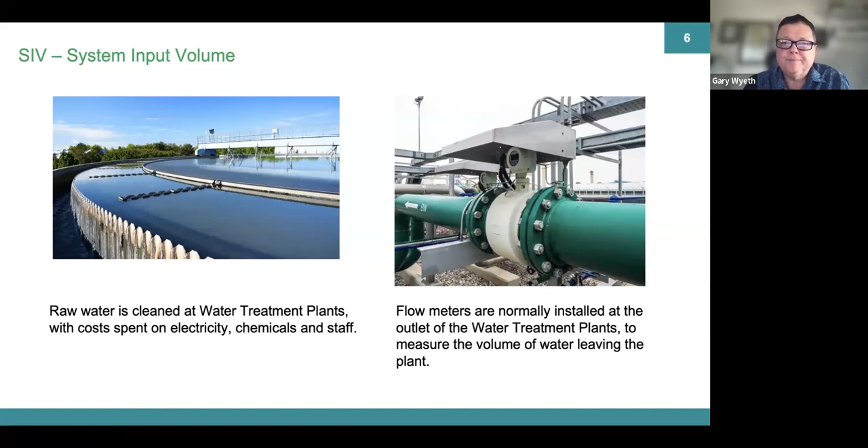Then at the other end of the system, we have a series of customer meters. In most countries, we would hope that all of our customers are metered so that we're measuring accurately how much water they are consuming. Those meters will be read on a regular basis, and the customers billed for the water they've used. So we've got two cost elements: the cost of treating the water coming out of the treatment plant, and the amount of revenue we're getting back from our customers.

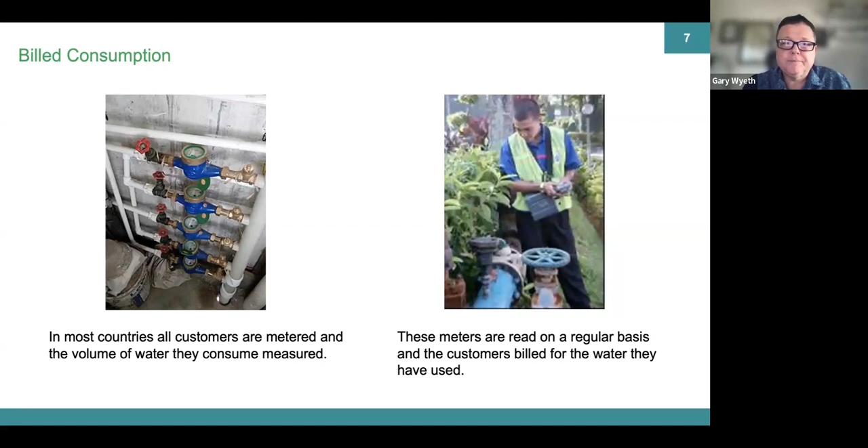There's actually a very simple formula for non-revenue water: system input volume minus billed volume. That means the volume of water coming out of our treatment plants minus the total volume being billed to our customers. The difference is called non-revenue water, because we're spending money to treat that water but not getting it back as revenue. Basically, we're spending water that's being wasted.

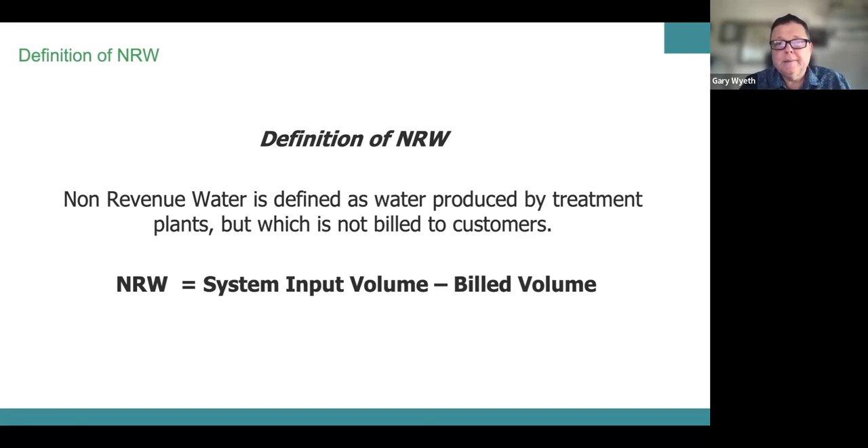Just to give you a little overview of non-revenue water, this is something conducted by a Japanese water research center back in 2016. It's probably quite old data now, and I wouldn't worry about the numbers because a lot of that has changed. But the key thing is you can see non-revenue water is very variable. We can get some utilities with non-revenue water down at 10%, as you can see here, which is in Japan—not the whole of Japan, but probably Japan as an average. And then you can see some other utilities have got more than 60% non-revenue water.

I know a couple of utilities in Malaysia, a couple of states, that have more than 60% non-revenue water. There's a figure for India, I noticed, which is 25%. I'm not sure how accurate that is—it looks like it was just guessed, really, because there's another one at 25% and 30% for Vietnam and Nigeria.

But what's also interesting is the worst one is Jamaica. This is in 2015, and it was at 69%. There's been a big contract in Jamaica for the last 5 years, which is basically a non-revenue water performance-based contract, and they actually have non-revenue water now below 40%. So it's not the end of it if you've got high non-revenue water—it is possible to bring it down, but you've got to work at it in small steps and take it a little bit at a time. It's not something you could rush through, really.

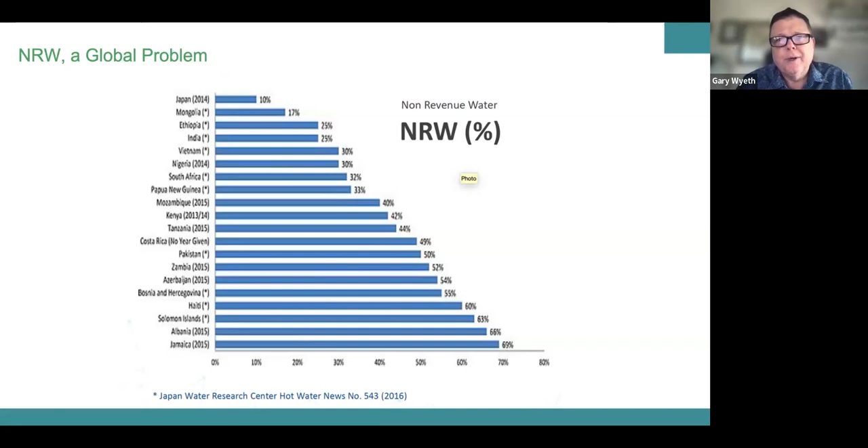Now that formula we were looking at gives you non-revenue water as a total for an entire system. So when you've got huge utilities like you'd have in Chennai, you're looking at an average non-revenue water across the whole of that system. And that non-revenue water is actually broken down into a number of different components.

For example, the meters on the outlet of the treatment plant. We mentioned that we put meters on the treatment plant to measure how much is coming into supply. But if those meters are inaccurate, if they're not installed properly or maintained properly, that can be an issue. Sometimes we go to utilities and find they don't have any meters at all, mainly because it's a cost factor—it's too expensive to put the meters on, or maybe they don't want to shut down the mains because of customer issues. But it's imperative that the meters on the outlet of those treatment plants are all installed and as accurate as possible, so we can get a really accurate volume of water coming from the treatment plant.

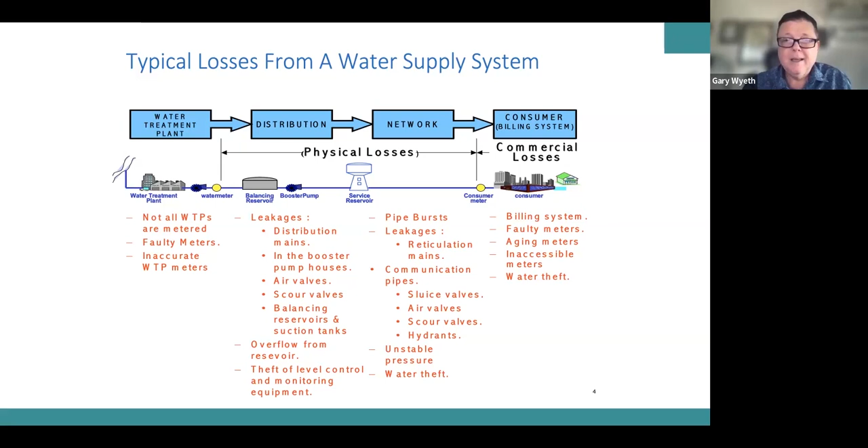So the best way that we want to break down all of that non-revenue water is we want some sort of framework that's easy for us to look at and easy for us to break down the non-revenue water into the different components, so that we can see where we've got the biggest volume and where we should start to do works to try and solve that problem.

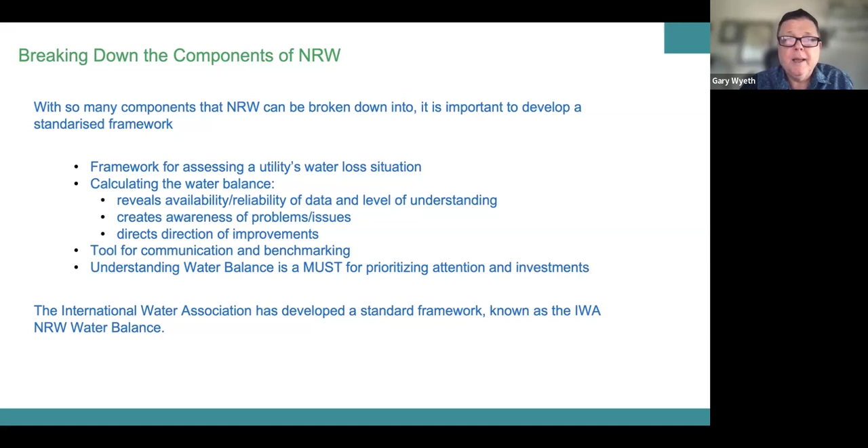And I'm going to go into more detail on a lot of these in a minute.

We've then got the losses, and these can be split into apparent losses and real losses. The best way to look at this is real losses like leakage, overflows from tanks, and leakage on customer connections, where you can physically see the water.

Apparent losses are basically unauthorized consumption or theft, and customer meter inaccuracies. These you can't physically see the water, it's more of a mismeasurement of the water that's being consumed.

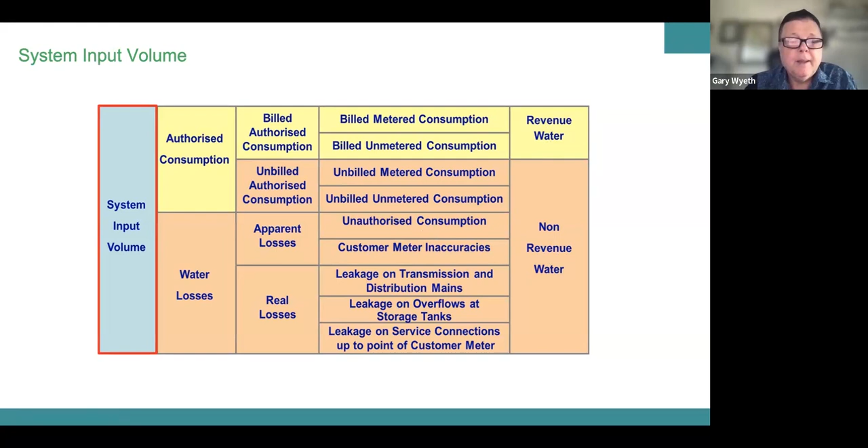So let's have a look at these different elements. The first one is basically going to be system input volume. As I mentioned, we tend to put very accurate meters on the outlet of our treatment plants.

I would say the most common type of meter that people use these days are electromagnetic meters. There's a few reasons for those. First one is they're quite accurate across different flow ranges, from high flow to low flow.

They are full bore, so you don't have any pressure head loss being created by the meter as you would do through mechanical meters. And because they're full bore as well...

Being electromagnetic, you can easily connect them up to SCADA systems and get data coming back so that you can record those flow measurements. The other big benefit is there's no moving parts like you would get in a mechanical meter that's rotating.

Based on that, you would expect your bulk meters to actually last a bit longer. You'd be looking at your meters lasting probably more than 20 years, compared to a mechanical billing meter, which would be probably 8 to 12 years.

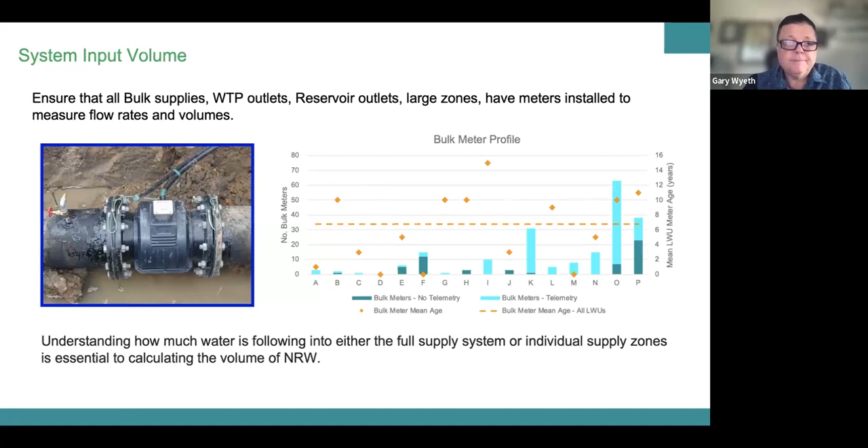One of the key things about these electromagnetic meters and ultrasonic meters, which are often used as well for larger diameter pipes, is that they need to have straight lengths of pipe upstream and downstream of the meter itself. The reason we want to do that is because we want to try and get as flat or straight a flow as we can, and make it less turbulent. We don't want turbulence in the pipe.

The reason for that is these meters have basically got small sensors inside the pipe, just two of them, one on either side of the meter. What they're actually measuring is velocity going past the sensor, and based on that velocity, they then convert it into a volume or flow rate going through the meter.

Now you can see if there was a turbulent flow, then we're not going to be measuring an average velocity at those sensor points. So you're going to get inaccurate flow readings.

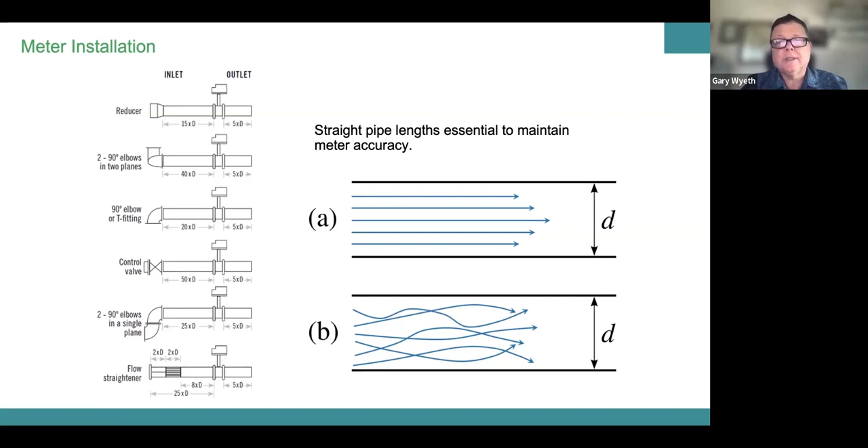It's the same, probably even worse, for ultrasonic meters, because they basically are sending ultrasonic sound signals across the pipe. And if you've got air bubbles or turbulence in the pipe, it can actually cause those ultrasonic sound signals to go wrong as well.

We really want to be connecting these flow meters to a SCADA system so that we're measuring the flow going into or through the meter, so that we've got accurate monitoring of the systems. The sort of things we would be looking for would be these points of low flow at night.

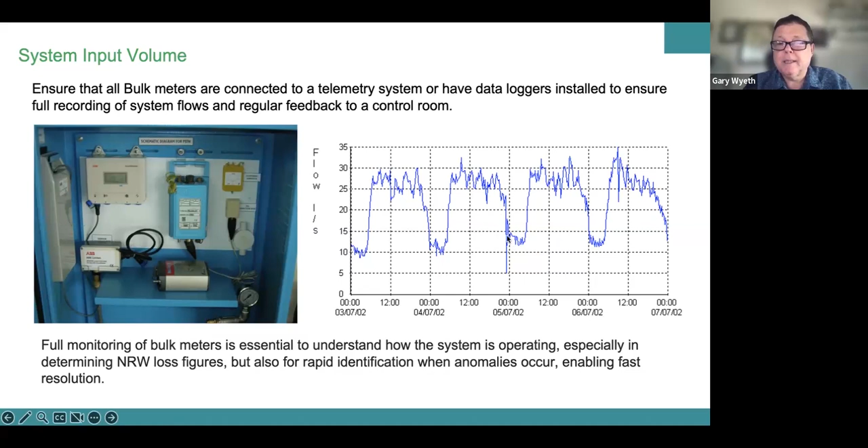These meters need to be verified quite regularly just to make sure that they're as accurate as possible. There are two types of verification that need to be undertaken. The first one is what we would call an electronic verification, which is just checking that the actual electronics in the meter are working as they should.

This used to be a problem maybe 20, 25 years ago. We used to have electronic drift in some of these electronic circuit boards, which meant they had to be recalibrated or verified on a yearly basis. It's not such an issue now, I think electronic circuit boards are a lot more stable, so probably once every 2 or 3 years would be good enough just to verify the electronics.

But that electronic verification doesn't verify the volumetric. So what we often do is use a temporary flow meter, like an insertion probe here, or a strap-on ultrasonic, to basically verify that the volume going through the pipe is what's going through the meter. We would normally put the insertion or strap-on ultrasonic downstream from this one, so it's not affected by anything that may be making this meter inaccurate.

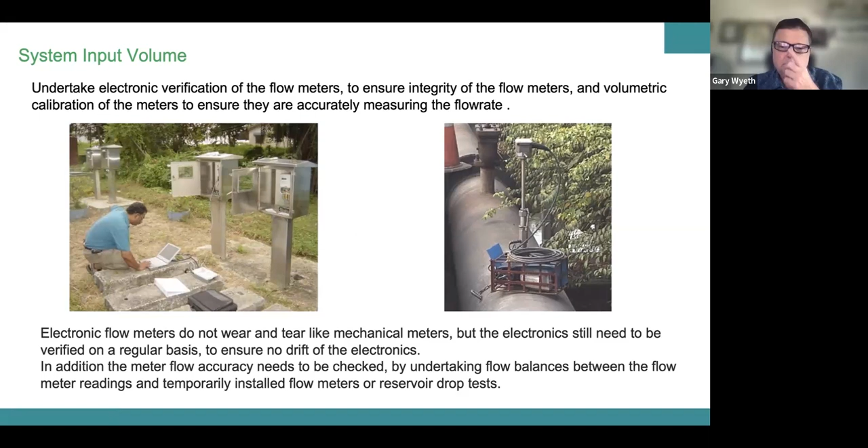So then we move into the next part of the NRW calculation, which is your authorized consumption. The first one is your billed consumption. So you would hope that you've got water meters on all of your customers, but that's not true for some countries, like even the UK. Even the UK doesn't have 100% customer metering.

This is a legacy really, that in the past there was no customer metering in the UK. It was all based on a fixed rate, so people used to get a fixed bill every year for their water, based on the size of their house and the value of their house. But the water utilities are steadily converting people onto meters, which will give a much more accurate volume of what people are using, and means people then start to be billed for the volume they're taking, which is good.

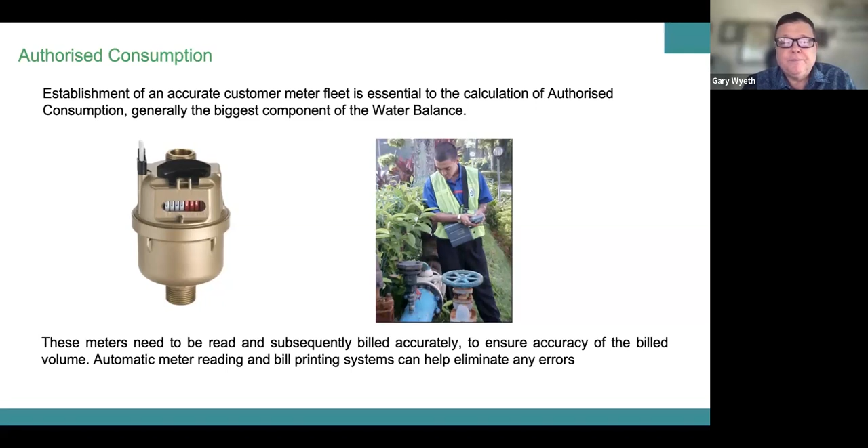Some utilities will actually connect their meters onto automatic meter reading devices, and this means a couple of things. One is that you don't have to have meter readers going round to every single meter and reading them, which would save on manpower and costs. But also with these AMR systems, you can start to get data more frequently, like daily data.

Once you're getting daily data, you can also start to make the data visible for your customers, so a customer can log on and see how much water they've been using for the last day or two, or week. This helps customers get better visibility of their water use, especially if a leak occurs in the property, then they can get a warning saying your consumption has shot up, there must be a leak in your house. Can you please go out and investigate it and fix the leak?

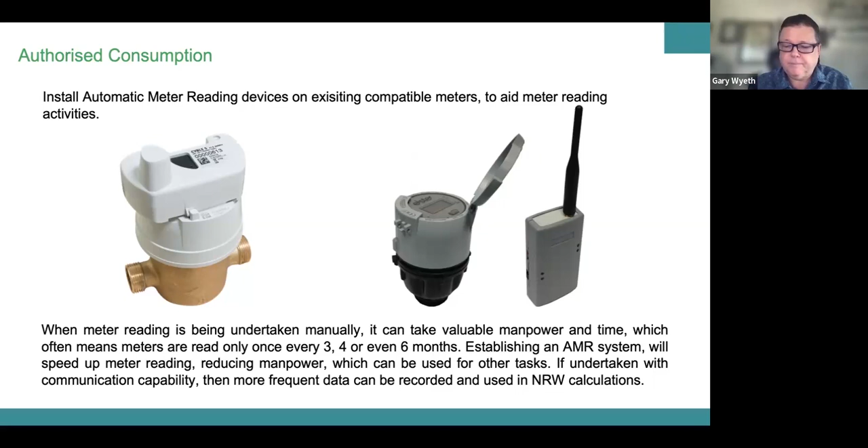Large customer meters. These are the customer meters supplying industry, commercial, hotels, all those sort of big businesses, and they actually use a lot more water.

I was doing a project with Air Selangor in Malaysia. They've got 2.5 million customers, and we looked at the top 1,000 customers. So 1,000 out of 2.5 million accounted for 22% of their volume of water supplied. So sometimes these large customers can be using a huge amount of your water supply.

So it's even more critical that these are being measured as accurately as possible, and on some sort of SCADA or telemetry system as well, so that if they stop working you get out there and fix or replace them as quickly as possible, so it doesn't affect your revenue. It's probably an even bigger issue because utilities often charge more to industrial or commercial customers, so not only are they using a majority of the volume, but they're also an even bigger majority of the revenue being charged to customers.

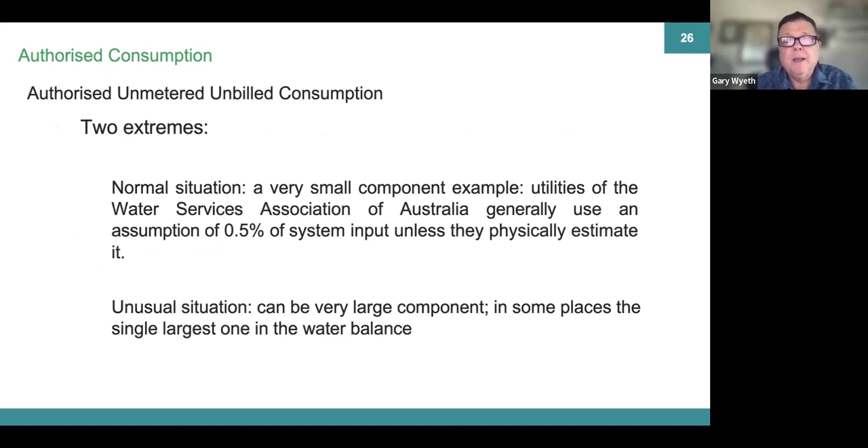So that you can account for it in the water balance. What's a bit worse is when you have unmetered, unbilled - this is where people are taking water, but you don't bill them for it and you don't meter them, so you don't really know what the volume of that water is. Once again, this is generally a small percentage. I think the WSAA says you can make an assumption of 0.5% of your system input volume, but sometimes it can be a very large component.

The sort of things we're talking about would be firefighting - if the fire brigade connects to the water main and start to take water, it's not metered, but hopefully you can make an estimate of how much water they are using. Flushing, mains flushing or sewer flushing happens quite a lot with utilities, especially when you're putting in new pipes, cleaning of new pipes before they're put into service. There's a lot of flushing there.

So we do ask utilities to try and estimate how much water they're using in these flushing operations. A few others that are not common, but sometimes public fountains, street washing, irrigation of public gardens is another one. Sometimes these are not metered and not billed either. If possible, move some of these - like irrigation of public gardens - if you can put a meter on and convert it into unbilled metered, at least you're getting an accurate estimate of how much water is being used in that component of non-revenue water.

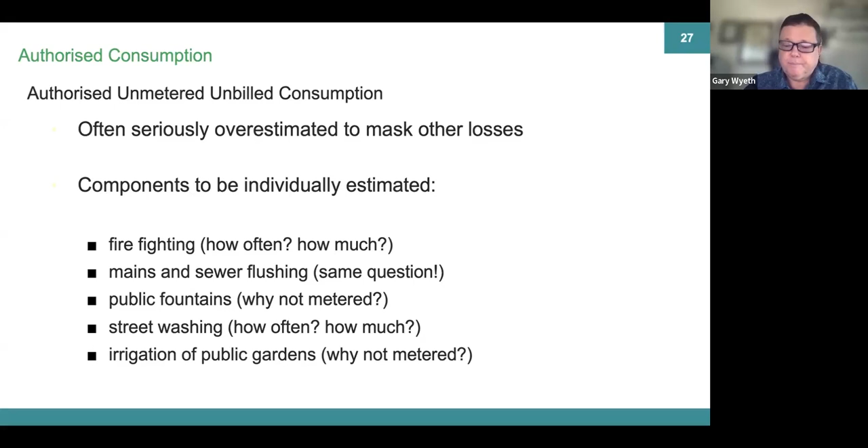Some of the big illegal connections can often be construction companies. So what we say to a lot of utilities is, if there are building sites, always check where those building sites are getting their water from. Make sure that they're connected to the main and that they've got a meter on there, so that you're measuring how much water is actually being used by those construction sites.

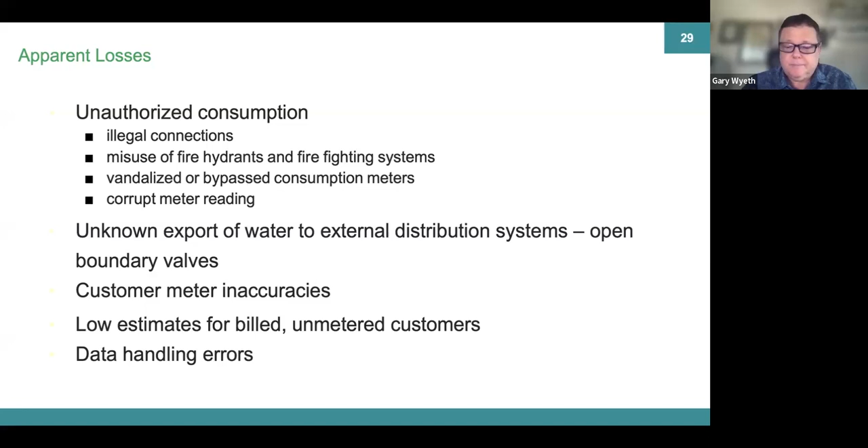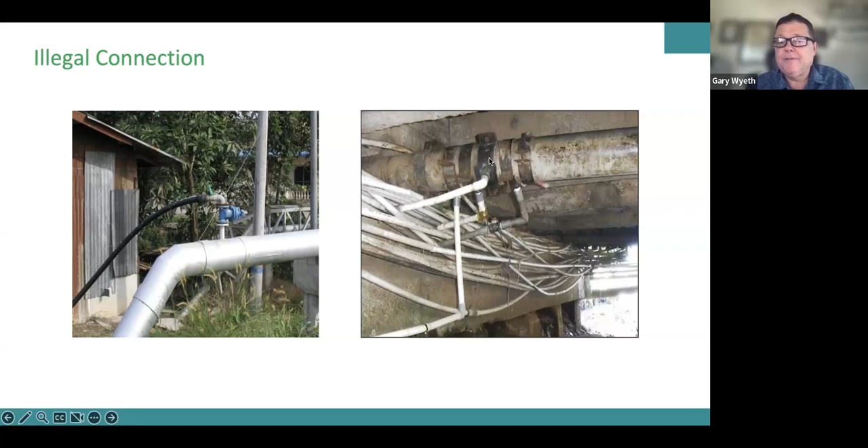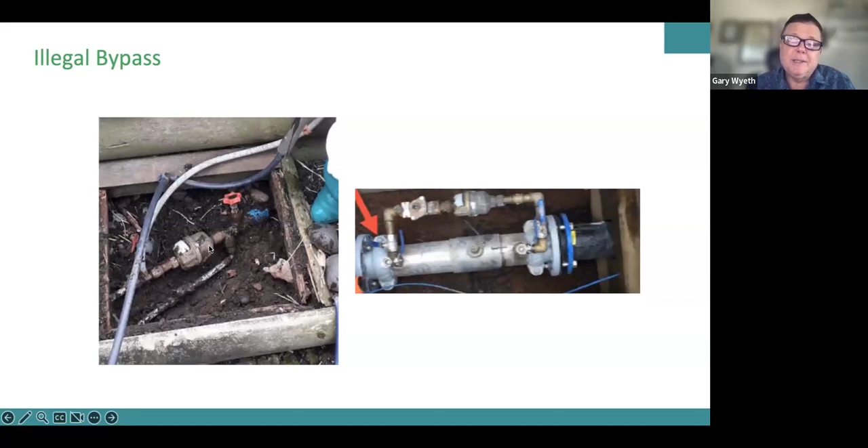So you can imagine what effect that's having on the pressures and flows in the network caused by all of these illegal bypasses. You can see here that this is a bypass around the meter. I don't know how this one thought they'd get away with it, because the bypass is about 4 times bigger than the actual pipe going through the meter. But quite often these bypasses can be buried, so you don't actually see this bypass pipe, you just see the meter above ground and you think everything's okay.

Missing meters. Quite often this happens when a customer doesn't pay their water bill, and so the water utility disconnects the customer and takes the meter away. The customer then has the option to go back to the water utility, pay their outstanding bill, and then get their meter back so they can start getting water again. But quite often customers think it's easier to just put a bypass or illegal pipe where the meter used to be. So it's important that when utilities disconnect somebody, they go back and check the customers who haven't come in to pay their bill, to find out how are they getting water. Because 99% of the time they'll have put in some sort of illegal connection like this.

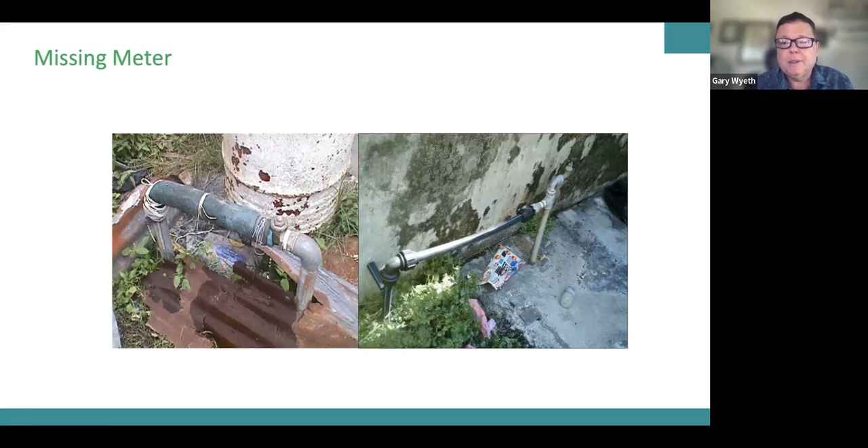Now, as I mentioned, these customer meters are mechanical and have moving parts inside - they've got bearings and they turn. Over time they basically wear out. They start off accurate, then slowly start to drop their accuracy until they eventually just stop working. Some utilities will just run them till they die, but the problem is they're going to be very inaccurate for a period before they die - that could be 3, 4, 5 years before they die that they're actually quite inaccurate.

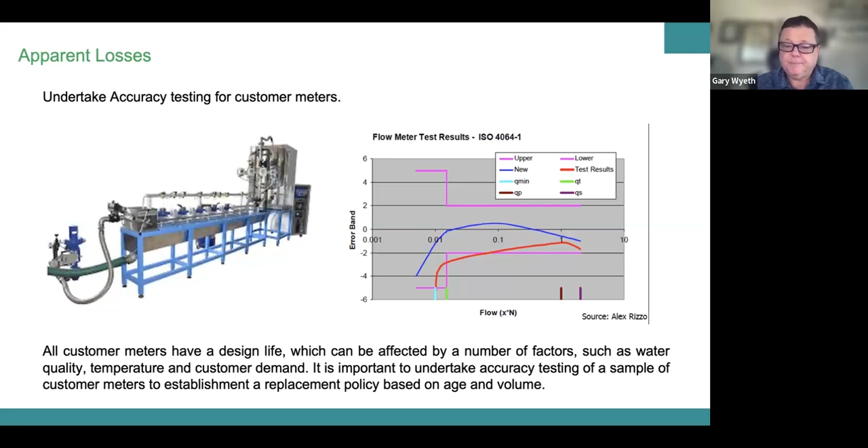We've done a lot of meter replacement programs in Malaysia and other countries, and we can see big impacts of revenue increasing - 10 to 20% just from replacing meters. So not only does it affect non-revenue water with the accuracy of your meters, but it also affects the revenue. Increasing the revenue from the water utility really helps to then have money to spend on other non-revenue water programs.

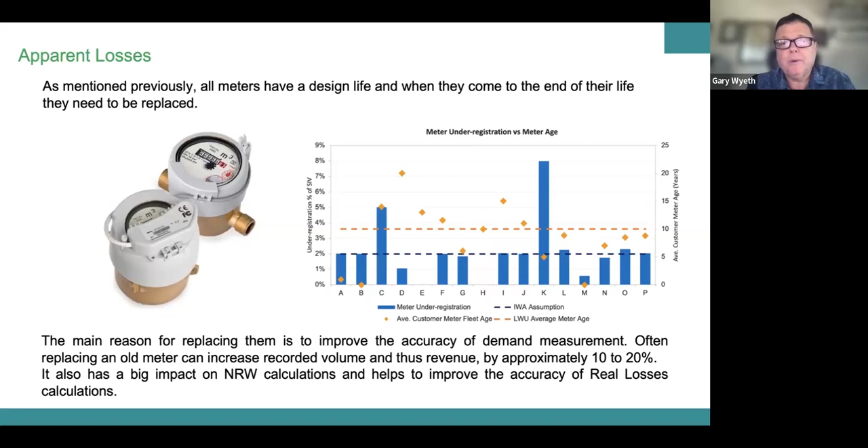So by doing that, on those different elements, we get the real losses to drop out. We take system input, deduct billed authorized, deduct unbilled authorized, deduct apparent losses, and what's left is the real losses, or the leakage.

We call this the top-down approach, which means we start here and work down to get our real losses. But the volume of real losses depends on how accurately you estimate these volumes up here, and quite often utilities will underestimate some of these issues.

That's why we then start to look at a bottom-up approach. This enables us to verify the volume of real losses, but it also helps us break down the real losses into leakage on transmission and distribution, leakage on overflows, and leakage on service connections. We do that through the establishment of DMAs, district metered areas.

What we're looking to do is divide the network into smaller, manageable zones. Generally, these DMAs, district meter areas, are between 1,000 and 2,500 customers. So some big utilities can often have hundreds, if not thousands, of these DMAs installed across their network.

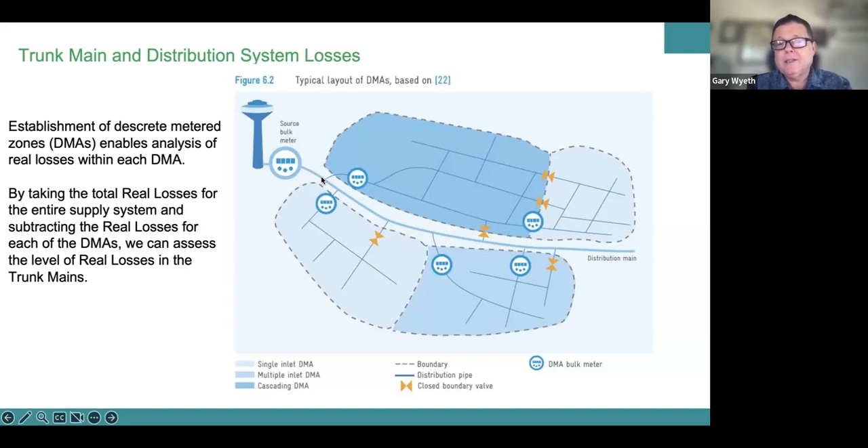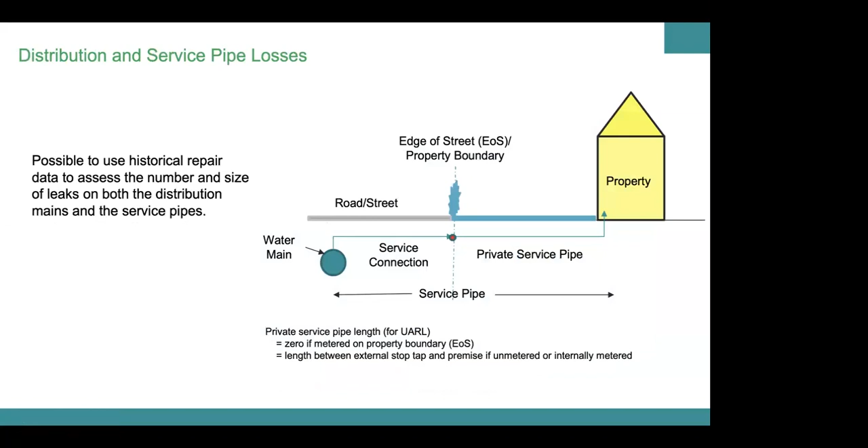We can also estimate leakage or non-revenue water in each DMA, and we can look at the breakdown between water main leakage and service connections. Generally, this is done using historic repair data.

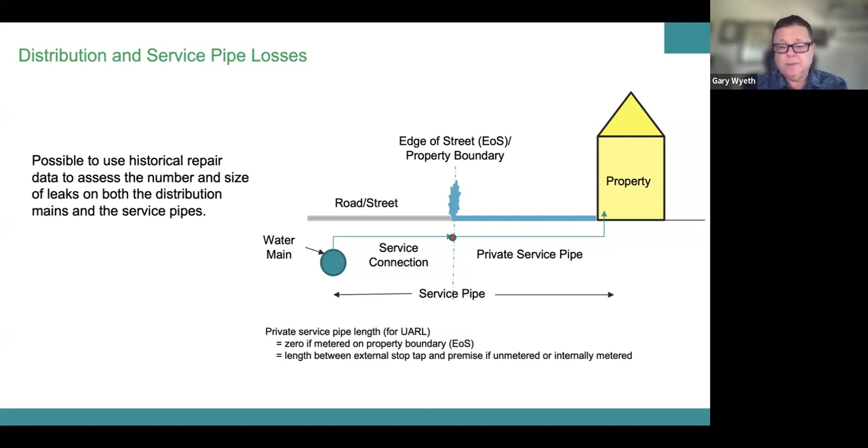If you have a utility that's found a lot of leaks on their mains pipes and their service connections, we can work out how many mains pipe repairs there were and how many service pipe repairs there were. We can then do a calculation to break the volume down between distribution leakage and service pipe leakage. This is actually real data.

What we're finding in a lot of utilities is that service pipe leakage is often a very big component of non-revenue water, mainly due to poor quality of materials. People are using cheaper materials for their service connections, poor quality installation, not burying the pipes deep enough, not using sand surround to protect them, and a bit of a lack of maintenance in managing those services.

So that enables us to do a real breakdown of non-revenue water using the water balance. This means we can look through each of these different components and identify which one has got the biggest volume. It could be that leakage on service connections, as I've just shown, has the biggest component. This means you can then say, okay, let's now do a program of leak detection on our service connections, or even just replacement of our service connections with better materials and better installation policies.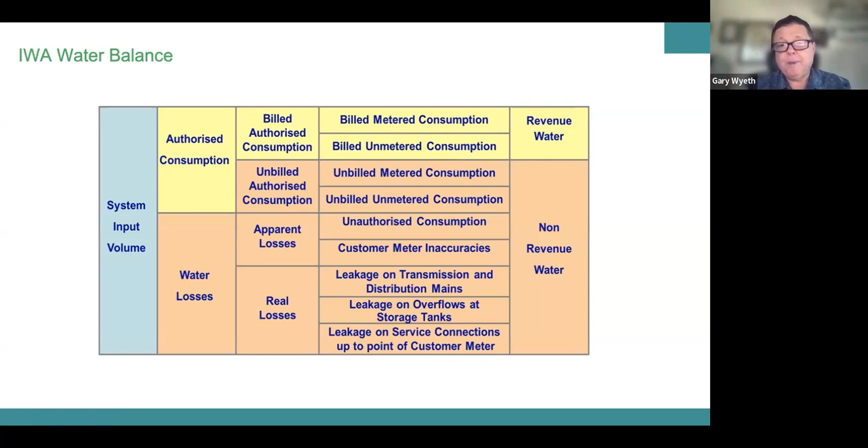It could be that your biggest component is customer meter inaccuracies — your meters could be very old and very inaccurate. By replacing customer meters with newer, more accurate ones, you'll help bring down your NRW more quickly, but it will also help increase your revenue. So it's quite an important way of breaking down the NRW to help you move on to the next step, which is developing a program of non-revenue water management.

Percentage is commonly used by utilities to report non-revenue water, and the Japanese chart I showed at the beginning used percentage to compare different countries. But percentage isn't a very good way of reporting non-revenue water, because billing data can vary greatly month to month due to the number of days in a month, the weather, and national holidays. In hotter weather people use more water, so NRW goes down as a percentage, and the same happens during national holidays when people stay home and use more water.

So one of the first things we recommend is that if you're going to use percentage, don't just do it month by month. Start looking at rolling averages instead, most commonly a 3-month or sometimes 6-month rolling average, which tends to smooth out the variations in billing data.

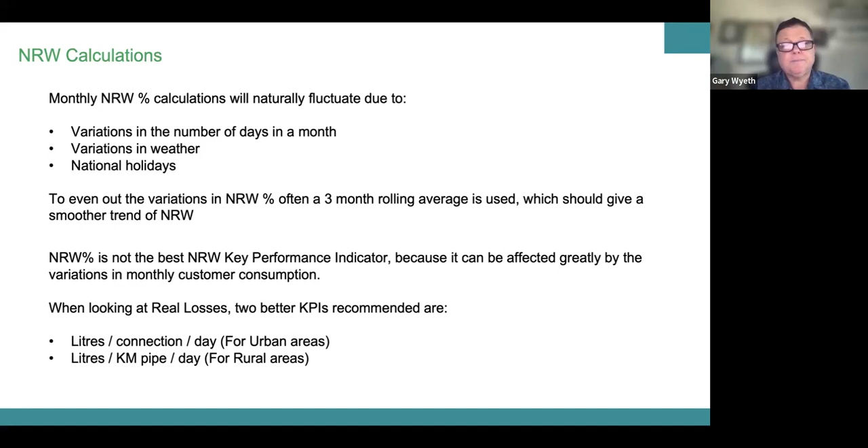Where the data is difficult to fill in the water balance - for example, when you come to system input volume and find that some of your treatment plant outlets don't have meters - the first step is to put meters onto the outlet of your treatment plants. That's the sort of thing this water balance can be used for.